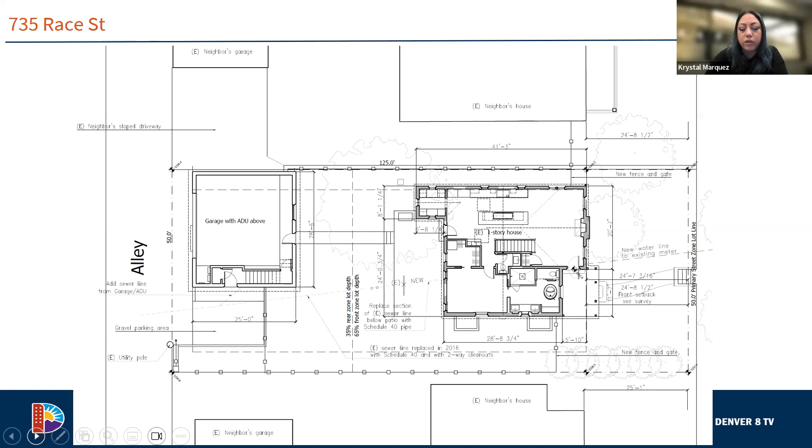Here you can see the new proposed roof for the primary structure. At the upper right corner are photos of the existing asphalt shingle roof, which appears to be in good condition. Design guideline 2.26 states to repair historic roofing materials and features and replace only when necessary. The applicant is proposing to change this roof material to a solar concrete tile in the color Stone Mountain Dark, shown at the left side of the screen. Staff has concerns that the new concrete roofing tiles will not match the profile and texture of the historic roofing, not meeting design guideline 2.26C.

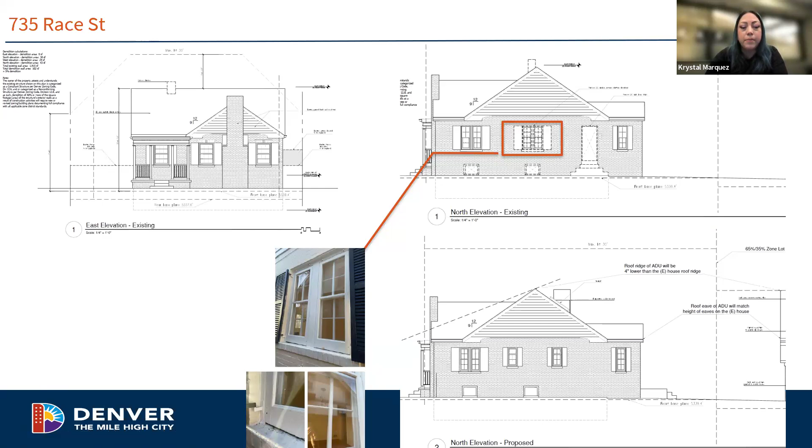On the left side here is the front facade of the primary structure. The only change being proposed is to remove a small portion of the chimney that remains, seen at the upper left. On the right side is the north elevation, where the applicant is proposing to remove 1 main floor set of original windows and replace 2 basement windows, and remove an existing side door and steps and brick in that area. Photos of the windows to be removed are at the center of the screen and are window number 4 in your application packet.

Here you can see the south side elevation of the primary structure, showing the other proposed changes to the windows on the house. At the top is window number 13, an original window near the front side of the house that is proposed to be changed to a smaller window with a higher sill. Photos of these windows appear to be in good to moderate condition. Design Guideline 2.14 states to maintain the pattern and proportion of historic window and door openings. The applicant is proposing to remove original windows and doors at 3 elevations in this application and replace with different sized windows. Staff was most concerned with windows number 4 and 13, as these are at the main floor side elevations and may be visible from public vantage points.

Guidelines 2.14E and 2.14F state to avoid enclosing a historic window or door opening, and also not to reduce an original opening, though more flexibility may be appropriate on a facade that's not visible, like the rear elevation. At the bottom is also the new proposed elevation showing the smaller windows as well as those two new egress windows at the basement level.

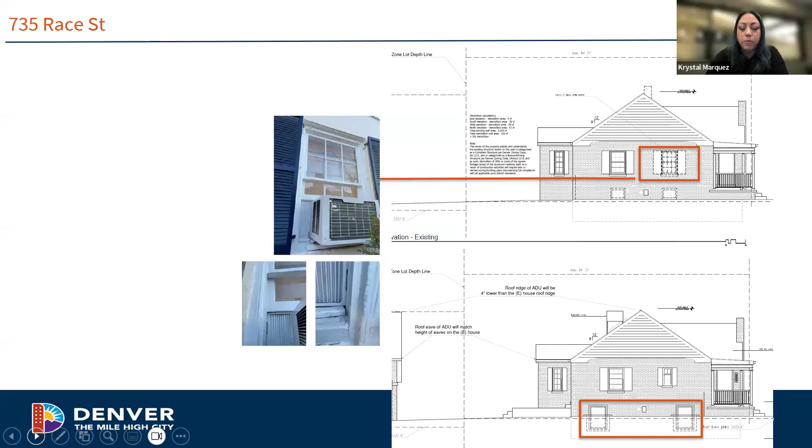Design Guideline 2.18 states to locate and design a new egress window to be as inconspicuous as possible. Point B specifically states to align a new basement egress window or expansion of an existing egress window with other egress windows and features on a facade. The new basement egress windows do not meet Guideline 2.18B. So staff would recommend the applicant align the new egress windows with the windows above and expand those existing basement window openings rather than creating new openings and bricking in old openings.

Next slide. So here you can see the proposed changes to the rear elevation that include removing two original windows and basement windows and adding a new patio and door, as well as a new skylight and cooler at the roof. Staff is supportive of the changes at the rear elevation as they will not be visible from public vantage points.

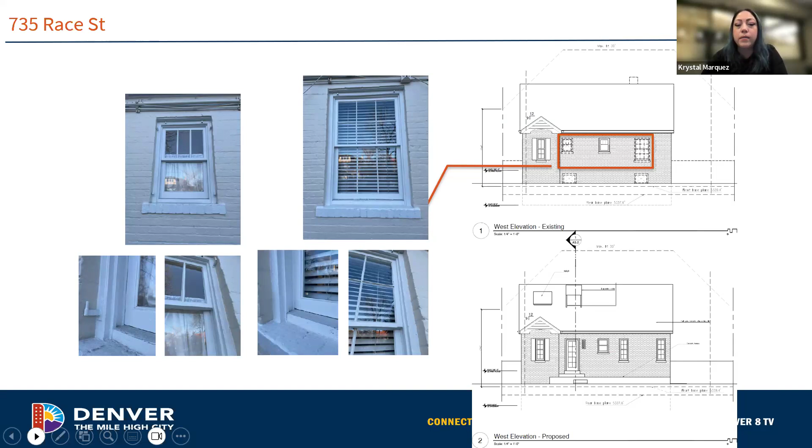Last, we'll look at the new proposed ADU. Here you can see the elevation facing the primary structure on the left and the alley elevation on the right. Design Guideline 4.19 states to design a new garage or accessory structure to be compatible with and subordinate to the primary structure and surrounding historic context. Staff is supportive of the overall mass and form of the new ADU, which is compatible and subordinate to the primary historic structure and fits with surrounding heights in the district.

However, point B states to design the mass, form, and roof shape of a new garage or accessory structure to be compatible with the primary structure and other historic accessory structures in the surrounding context. The roof shape of the new ADU is somewhat atypical, as it has an inset portion under the main part of the roof closest to the north property line. None of the district examples shown in the application have this type of roof design, which makes this portion appear more like an addition rather than part of a new ADU structure.

The applicant stated this was for zoning and building purposes. Additionally, at the west alley elevation on the right, the form with the additional half wall jutting out from the rest of the structure is atypical and is not characteristic of the district. The placement of the belt course also on the structure appears awkward at each elevation due to changes in form at the inset roof portion on the left side, and also in relation to the half wall, as you can see here on the right side at the alley elevation.

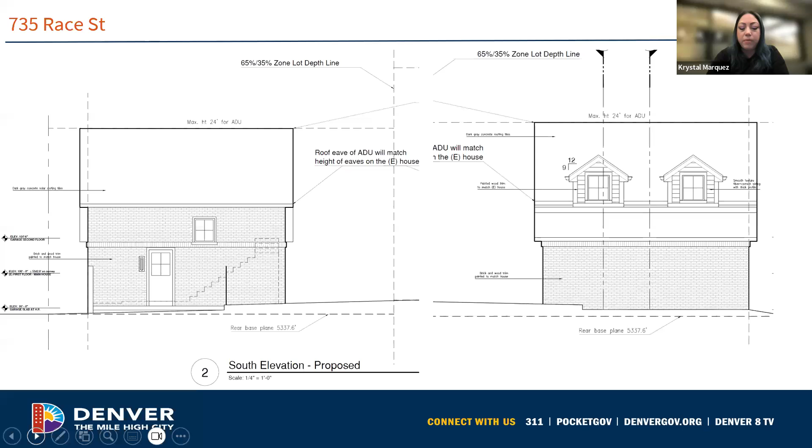And then finally, here are some isometric views of the new proposed ADU. The new structure will not be highly visible from the alley and is appropriate in terms of overall mass and scale, but has some issues with the form, roof shape, and detailing. Therefore, staff is recommending denial.

Okay, Krystal, thank you. Commissioners, do you have any questions for Krystal? No? Okay, all right, great.

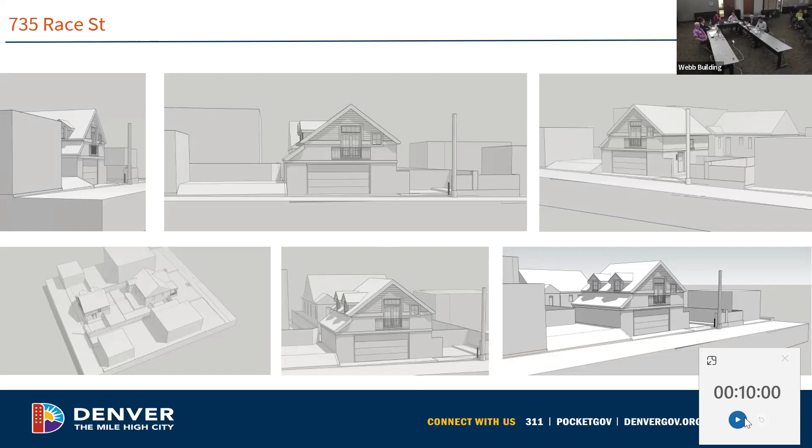Good afternoon, my name is Ann Cuthbertson, I'm the architect for this project. My home and work address is 730 North Emerson Street. I am also in this district and have done a lot of work here over the years.

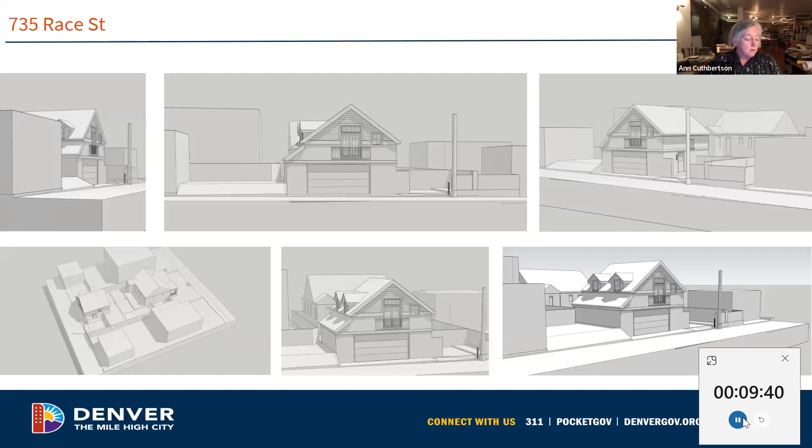I would first like to address the four main points that Krystal made leading to the staff recommendation for denial. I'll take them in order, because in many cases I respectfully disagree with some of the interpretations of the design guidelines on specifics.

Regarding the window changes on the main house, we are not actually recommending replacement of any windows. As Krystal said, and as our window assessment points out, the existing windows are in good shape. We're proposing minor repairs to all the existing historic windows, such as replacement of sash cords, since all of them have been painted shut. We will carry out careful historic restoration of the windows we're not proposing to change.

The guidelines, as I read them, do allow for making changes to historic windows, even if in good condition, to support modern life. Specifically, the window sills in the main house are barely 28 inches off the floor, which wouldn't allow for kitchen countertops or bathroom vanity countertops at those heights. We're taking pains to propose the new windows, including window wells in the basement, to be symmetrical about the main roof ridge of the house. In some cases that doesn't place them exactly where the windows being removed are, but I don't read anything in the design guidelines that prohibits some specific relocating of window openings.

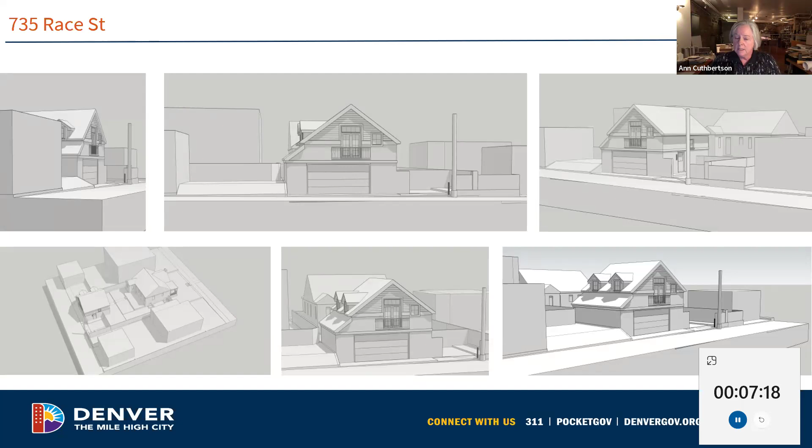Moving on to the roofing. I understand this is a new product, so there's not much chance we could point to other existing projects anywhere in Denver using this solar tile. I've been following with great interest the progression of solar roof tiles, and the industry has definitely gone through some failures of the product since they first started being explored about 20 years ago.

But I believe this product we're proposing has solved many of the problems that plagued these products when they first came out. I'd suggest this is, by a long shot, a more elegant solution to solar than traditional solar panels on houses. Obviously we can't claim this is similar to any historic product, but I think we should all be concerned about moving away from fossil fuels and towards renewable energy sources.

If we're limited to things that already exist in the historic districts, we'll never be allowed to consider products such as this. I also wouldn't consider the existing asphalt roofing to be historic or original to the house. One neighbor who's lived in this district a long time recalled that the house originally had cedar shingle, which we wouldn't be proposing to return to, but it's more similar in profile and appearance to these concrete solar panel roofing tiles.

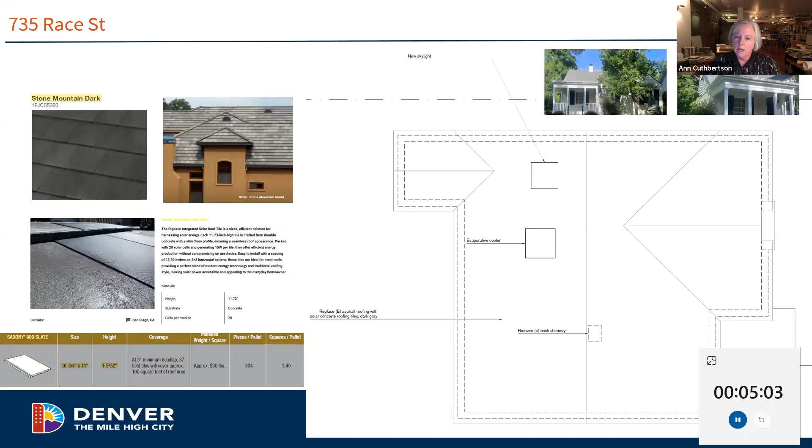I wouldn't agree that there are not other garage ADU combinations in the district that have some asymmetry. There are a couple of examples in your packet. They don't look exactly like what we're proposing, but I don't think it's a fair statement to say that there are not other asymmetrical examples as precedent.

What we are shooting for is not symmetry, but balance with the design. And the reason we can't achieve strict symmetry just has to do with some site constraints.

To the immediate north of our project is a driveway for the adjoining neighbor, and their driveway is extremely steeply sloped, such that by the time it meets most of our north wall of our existing garage, it is almost 2 feet above the level of the alley. So if we were to just pull the entire garage to the south by the setback required for the upper story ADU, we would have a very odd kind of alley-like condition between their driveway and the wall of our garage.

Similarly, the use of the shed roof is our trying to comply with a zoning requirement which limits the ADU to the full setback and yet allows the garage to be zero lot on that north side. And they require the wall of the ADU to be measurable. Therefore, we couldn't just continue the roof straight from the lower eave up to the new ADU ridge. They actually require, for their conformance with the bulk plane and the setback, that small eave at the ADU. So I understand that it bothered some members of staff, but we are trying to comply with some other agency requirements with that configuration.

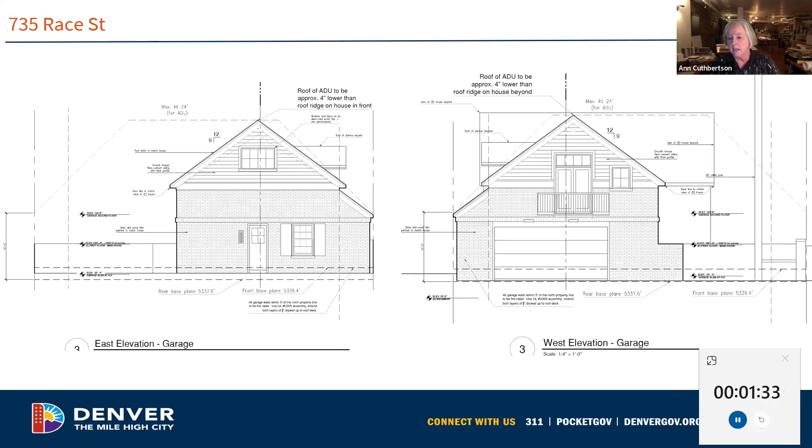Okay, thank you very much. Commissioners, do you have questions for our applicant? I have a question.

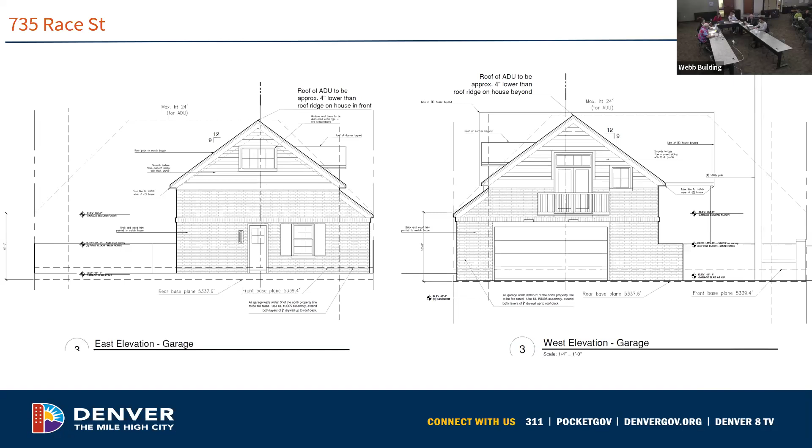The submittal has one page showing what the solar roof tiles look like, and then several pages of concrete roof tiles. I'm not clear what the solar roof tiles look like when applied to a roof, because it's just an image of what looks like a tile, and then the description talks about battens and other sorts of things. So it's not really clear what the solar tiles look like in a roofing application. Could you talk about that?

That is a great question, and I certainly wish that I had good photographs of anything in the metro area that has already used this product, but I was unable to get that information from the manufacturer. The product, you can tell easiest in the bottom left image on your screen, is a solar panel directly applied to a substrate, which is these concrete roofing tiles. And then the way it works as a solar panel tile is that all of the solar panels are underneath the tiles, linked together for capturing the solar gain.

So the tiles themselves will have the appearance that you won't see very much of the underlying concrete tile. You would see that primarily at the ridge, where there will be a fully concrete ridge tile. And that's why we're choosing the concrete base color to be as dark as possible so that it won't be jarring in contrast to what is a very dark, not quite black, but very dark color of the solar panels themselves.

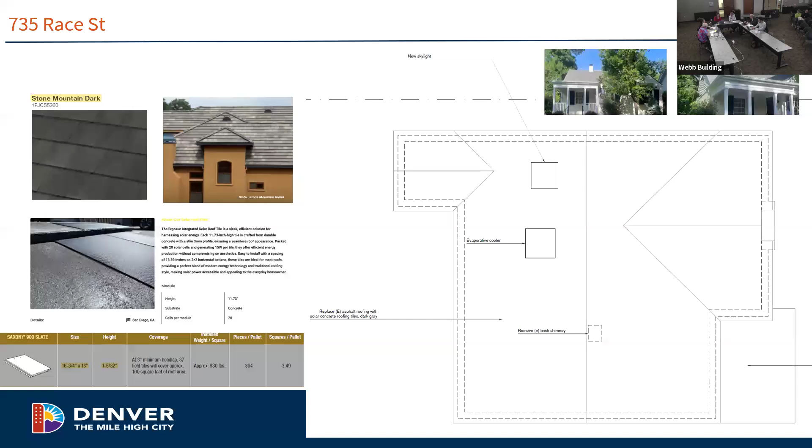Okay, thanks. Anybody else? George, or I mean Erica, sorry. You didn't have anything? Okay, great, thank you very much. Now we'll go to our public comment, to see if there's anybody that would like to make a public comment.

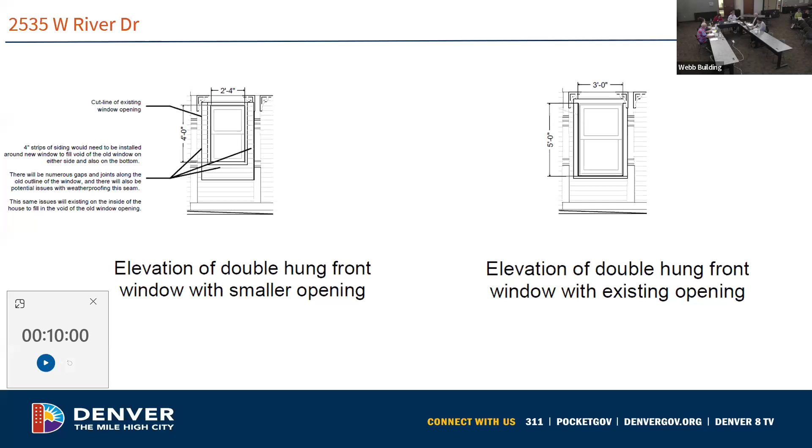The applicant is not here personally, so let's go—there's somebody there virtually, excellent. All right, applicant, can you hear us? I can, can you hear me? Yeah, we can hear you. Hi, you'll have 10 minutes to tell us about the project, and please begin that 10 minutes with your name and address, please.

Yeah, so my name is Robert Loddick. My address is 2535 West River Drive. It is the subject property, and I am the homeowner on this property and live there currently. I just want to thank Crystal for the overview and explanation. I want to start by saying that this is, I think, my 3rd or 4th time in front of the board at this point. The project has been underway for at least almost 2 years in construction, 3 years in the design phase, and I just moved back into the house, and I'm really hoping that we can do whatever possible to make this fix to these windows the least intensive as possible.

I understand that the windows do not match the historic nature of the original windows. However, I do want to point out, and I think Crystal mentioned this before, that the windows that were destroyed by the contractor were not original historic windows. They were aluminum windows, and they were not part of the historic structure of the house.

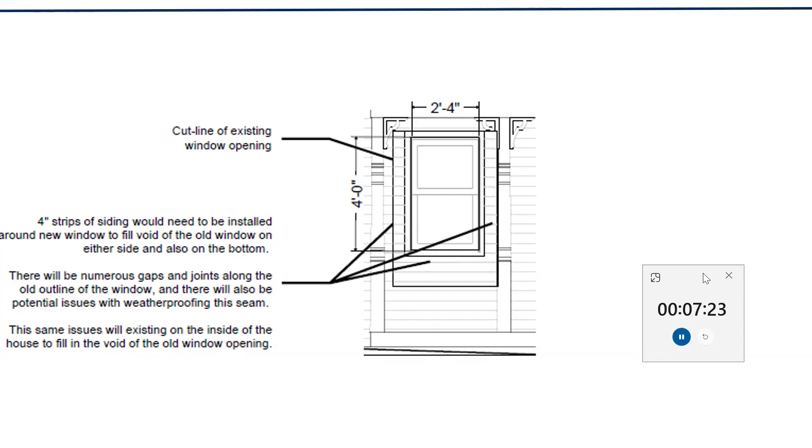And then the same issue applies on the inside of the house as well, on the drywall. So if we make this window smaller, there's going to have to be additional drywall patches and repairs made and associated with that. And then, I know this is not your guys' problem, but for me personally, I am living in this house, so all these additional steps will just make it that much harder for me to be living there while all of this is going on.

So I thought that replacing the window with the double hung window was a fair and good compromise, and will also provide a better final product that won't have aesthetic issues or issues with weatherproofing. So I hope that you can consider this as a potential solution here. Thank you. All right, great, thank you.

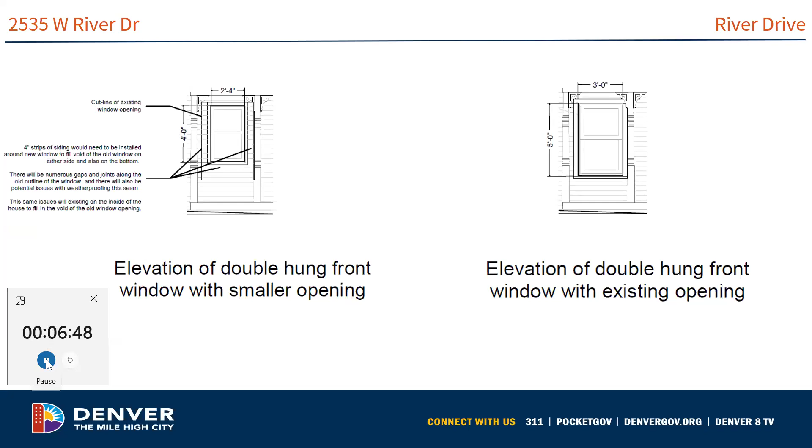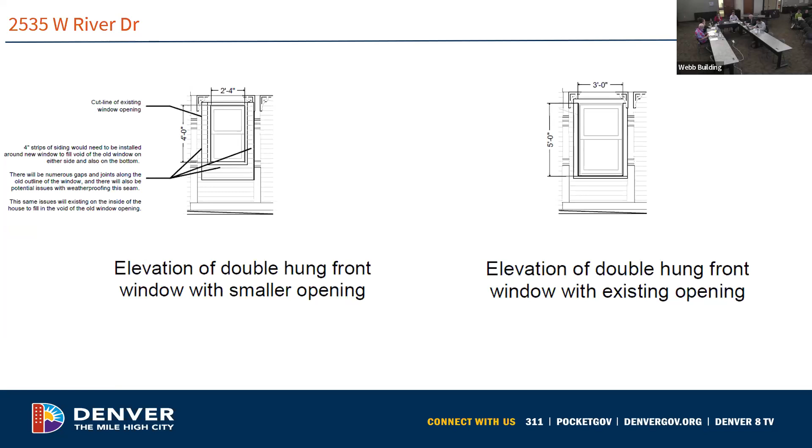Commissioners, do you have any questions for our applicant? I have one question. Go for it. Looking at the photos, it appears that not only are the new windows larger, but it also looks like the head height is lower. Is that correct, or am I just misinterpreting?

That is, yeah, that is correct. The head height is slightly lower. Again, that was the same contractor that destroyed the windows who put it a little bit lower there. So yes, that's correct.

Anybody else? Questions for the applicant? Doesn't look like it. Thank you very much.

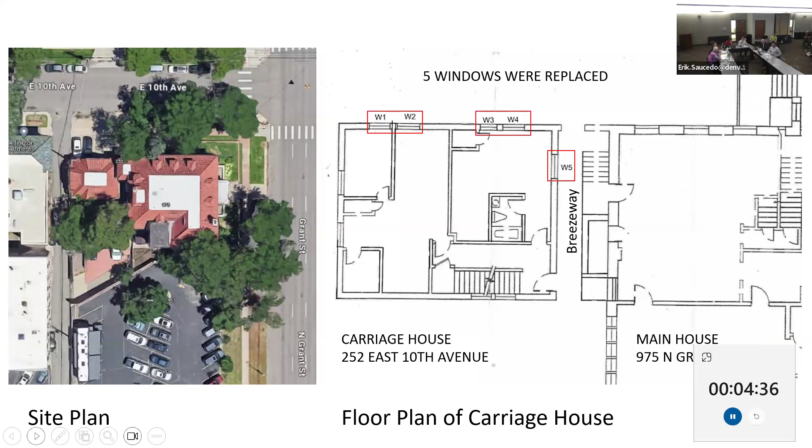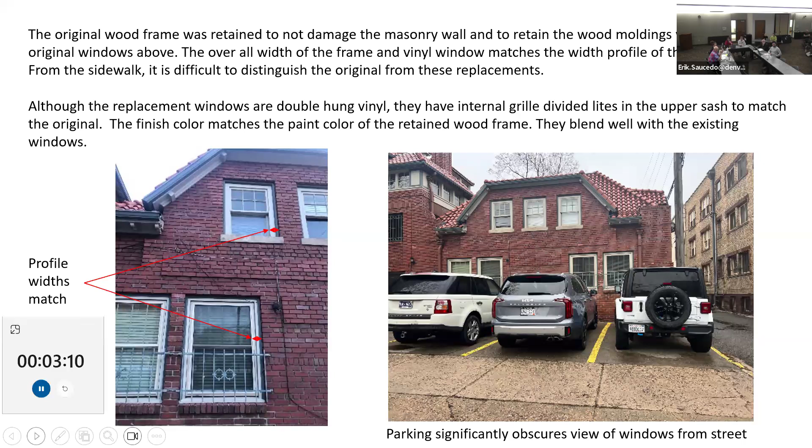So what I'm showing on the left here is that, although this is vinyl, the frame width matches the windows above. So from a street view, these windows look very like the original windows above. Also from a street view, since this is a parking area, most of the time the windows are obscured by vehicles parked there.

So this is just a little bit of detail showing what parts of the 1970 wood windows were retained, the vinyl installed, and that there are in fact muntins between the glass. With respect to our budget, every effort was made to replace these windows to be consistent with the existing structure.

And as noted here, the carriage houses have not been being treated the same in Landmark. I don't think we were saying that it was a non-contributing structure, but that it was an accessory structure, not the primary structure, where these windows were replaced.

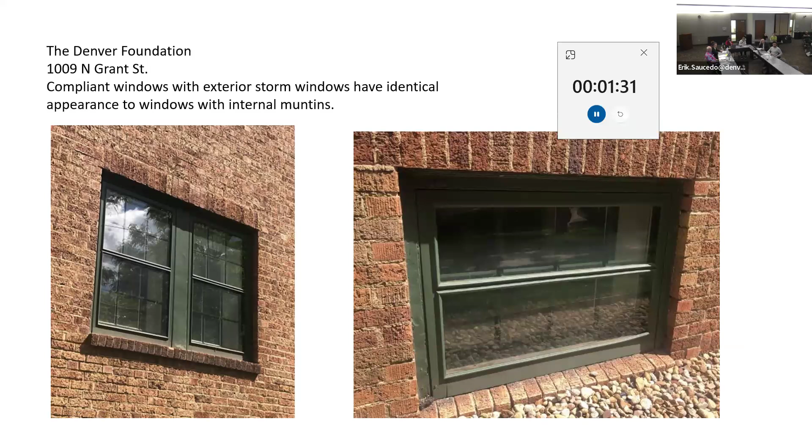And in fact, this is the Denver Foundation across the street from the carriage house, that has in fact done these compliant storm windows on the outside of the muntined windows. And from the street, they look like muntins between the glass.

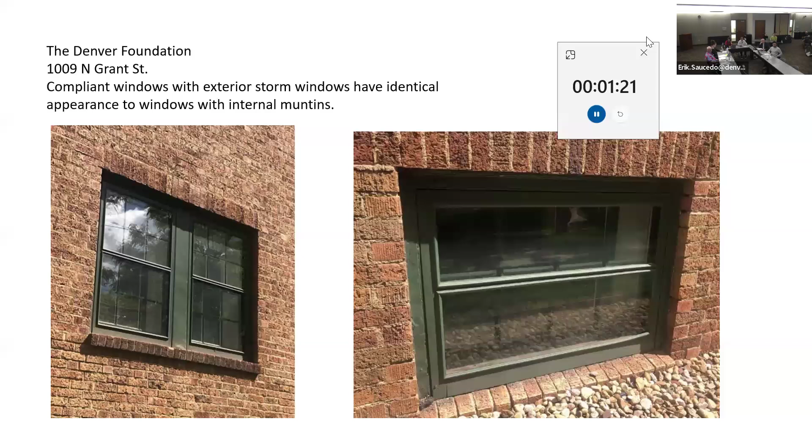So I've come back to this slide again, that is a significant structure. It's on the National Historic Register, and this structure sets a precedence for the neighborhood. It was approved by Landmark in 2015 for 86 windows that are vinyl windows with muntins between the glass.

So as a final note, this is our request: based on the fact that from the streets these windows look very like the windows that are historic and above, and there are multiple instances of vinyl windows with muntins between the glass in the district, some of which have been approved by Landmark, having a private owner required to replace these windows is not equitable and seems a bit arbitrary.

Thank you. Commissioners, do you have any questions for our applicants? No, no questions? All right, great, thank you.

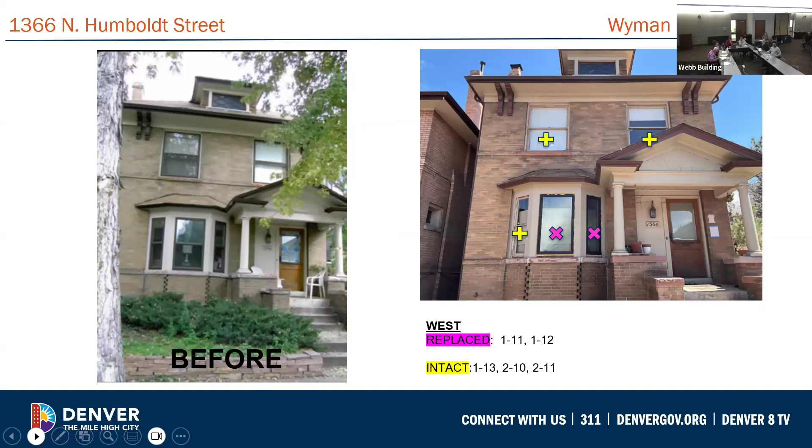4 on this side - sorry, the slides are hopping around beyond my control. 2 historic windows on the south side and 1 on the rear. Since the initial contact with the property owners, they have made a revision to their proposal.

As I said, 5 windows were replaced and were replaced with a composite. They are now proposing an aluminum clad window and will change the operation on the bay windows back to double hung, and staff supports that. The aluminum clad window proposed is a good match to the original in terms of the dimensions of the window components. What we are currently not in support of is the replacement of the remaining 10. Next, please, Brittany.

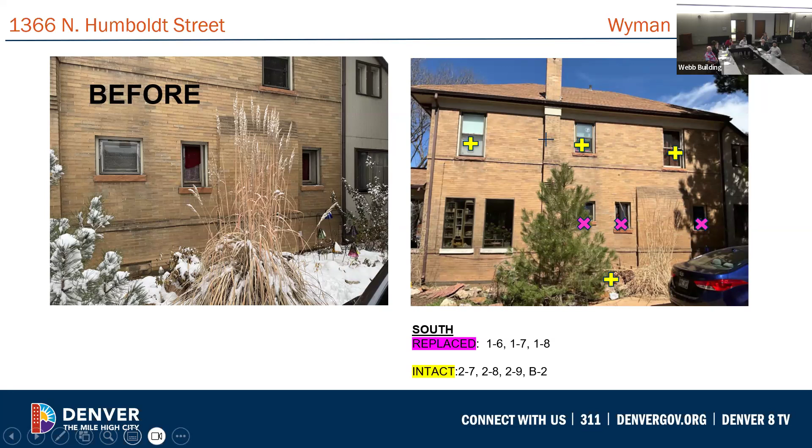So the applicant happens to be a professional in the window replacement industry. He assembled his own assessment of the window condition, as he was having difficulty getting one of our recommended historic preservation consultants to respond to his inquiry. He did manage to pull that off at the last moment, so there's information in your packet that includes both the applicant's assessment and the historic preservation specialist's assessment.

In general, the conclusion is - next slide please - that the original windows all show representative deterioration that you'd expect of windows of this time frame. One of the images here is a hopper window on the side of the building. It is not particularly visible. It has some rot at the sill.

Other windows have peeling paint, missing ropes for the operation. At least one is racked in the frame and difficult to open and close. Again, fairly typical of windows this old. I understand there's been some efforts over the years to maintain the home in general, and particularly these windows, and the applicant feels at this point that they are beyond salvage.

That is not what's indicated by the window assessment by the historic preservation professional. On this chart, I've indicated the windows that are original and remaining are yellow, and those that are pink have already been replaced. You'll see a lot of windows on this chart.

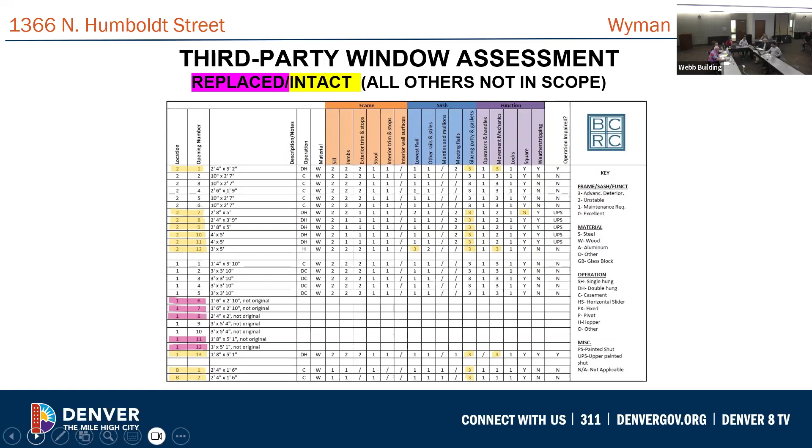Staff finds that the design guidelines to replace all 10 of these windows are not met because of their repairability. We are recommending denial. I will say that there are 4 windows that have limited visibility: 2-1, on the rear of the building, 2-12, the hopper on the side of the building—it's quite close to the adjacent home—and 2 basement level windows. We do support the aluminum clad product that the applicant has recommended. It's a good match, but we find that repair is the first priority.

That's it. Okay, thank you. Any questions for staff? No?

Oh, so sorry, I plugged in the wrong computer. It's okay, it's all right.

By this time, you probably know the routine. You'll have 10 minutes to tell us about your project. I'll be short. Okay, please give us your name and address for our record. Ted Coombs, 1366 North Humboldt Street.

This is the house I grew up in, in the 80s. My dad did restoration on it. My father was an architect. It is in brutal disrepair. We inherited it when my father passed away September 30th.

We're in the process of trying to go through and get things fixed up as much as we possibly can. It's been a rental for the last 30 years. I don't even know what to tell you about the interior—water damage, all sorts of stuff. The biggest issue that we had, and the reason we decided to go through and do replacement, was water.